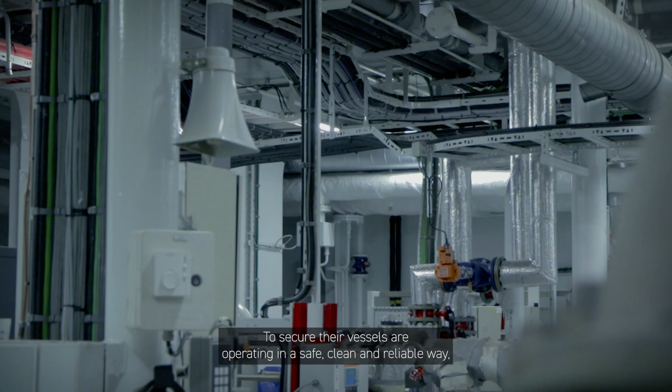The global commercial shipping fleet is responsible for the transport of around 90% of the world trade. To secure their vessels are operating in a safe, clean and reliable way, the shipping companies invest in the best propulsion, automation, monitoring and safety equipment possible. Even still, unwanted incidents happen from time to time, one such serious incident being the blackout.

Blackouts occur when there is sudden total loss of electrical power in the ship's main power system. It is an incident that scares even the most experienced of mariners, as it brings the whole vessel to immediate standstill. Troubleshooting blackouts can be a tedious process.

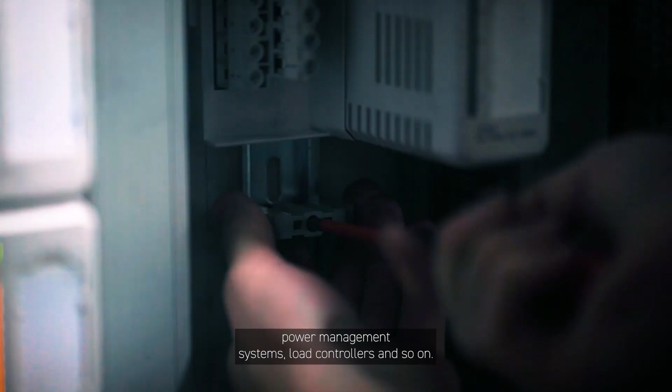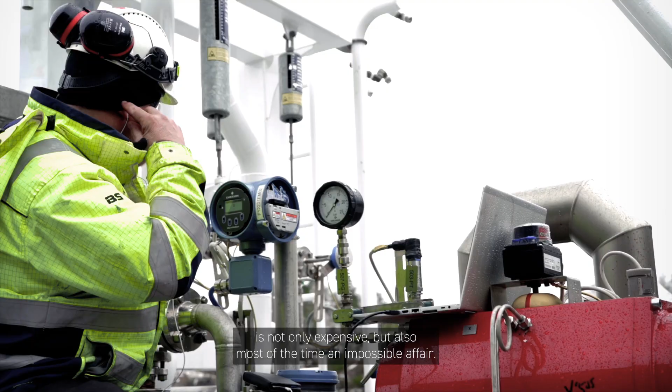Advanced vessels have multiple systems that are involved in the power generation, such as engines, generators, engine control systems, voltage regulators, power management systems, load controllers, and so on. Calling out system specialists to figure out the cause and events leading to the vessel blacking out is not only expensive, but also most of the time an impossible affair.

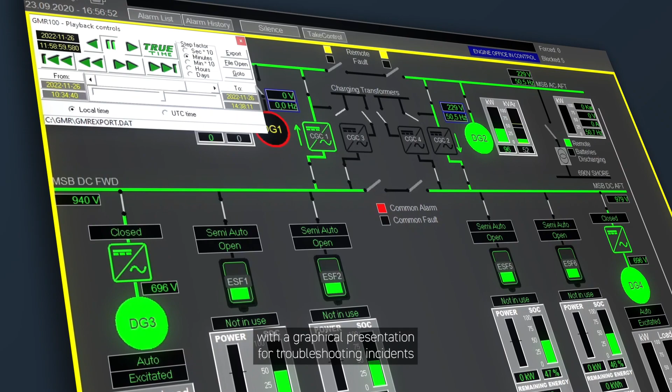With so many system factors that affect the outcome, the only reasonable investigation method is to check the historical data by using Høglund Playback. Høglund Playback is a unique logging tool with a graphical presentation for troubleshooting incidents fully integrated in the Høglund automation system. Høglund Playback logs every signal in the automation system every second and stores it in a replayable file.

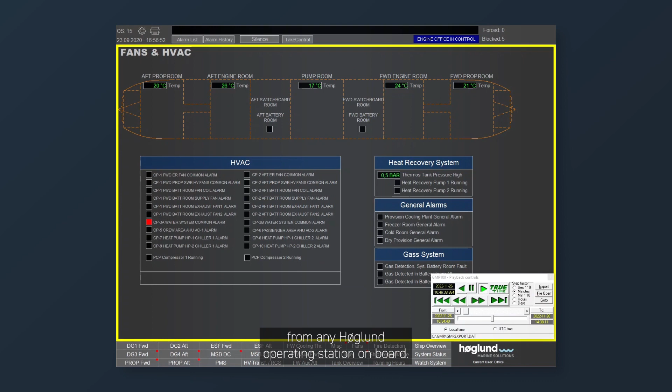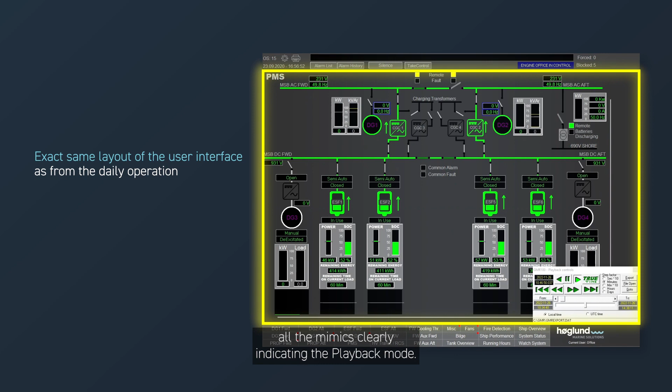Crew will be able to start playback mode from any Høglund operating station on board. They will see the exact same layout of the user interface as from the daily operation, but with a yellow frame around all the mimics, clearly indicating the playback mode. You just start the playback, rewind back to the time of the incident, and navigate backwards and forwards through the displays.

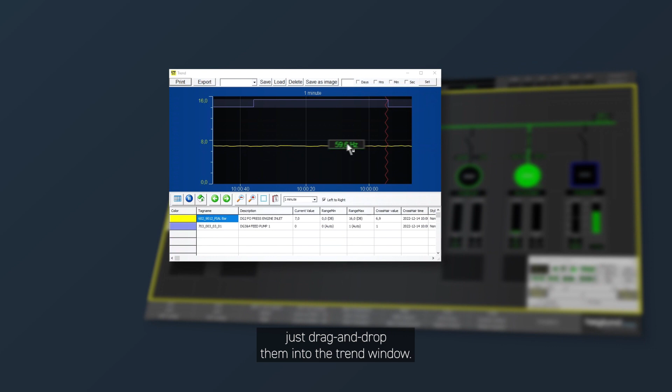When you need to compare signals in detail, simply right-click any object and click Trend to open a new trend window. To add more signals in the same trend window, just drag and drop them into the trend window. Use the navigation buttons and range selection properties to adjust and navigate as needed.

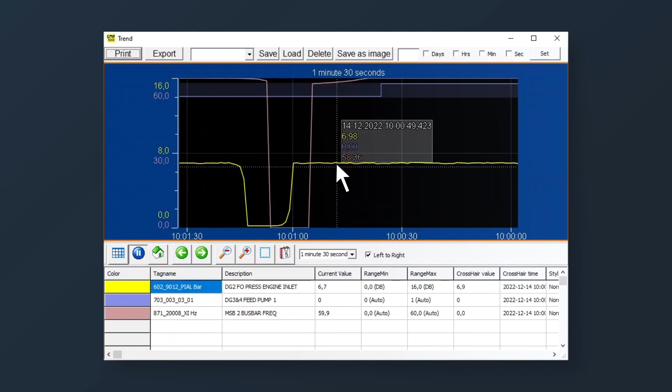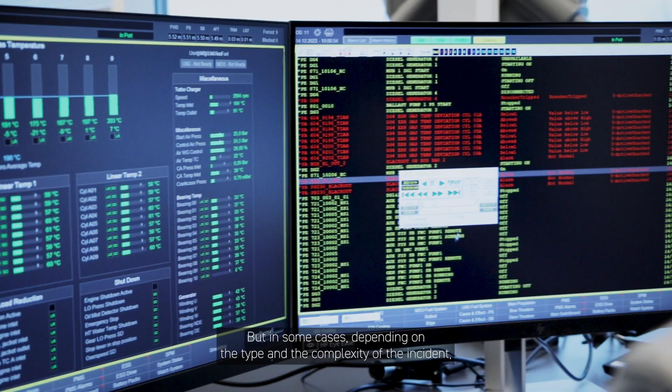In most cases, you will manage to investigate and find the cause of the problem entirely on your own. But in some cases, depending on the type and the complexity of the incident, you might want to ask a colleague, system vendor, or a Høglund service engineer for assistance.

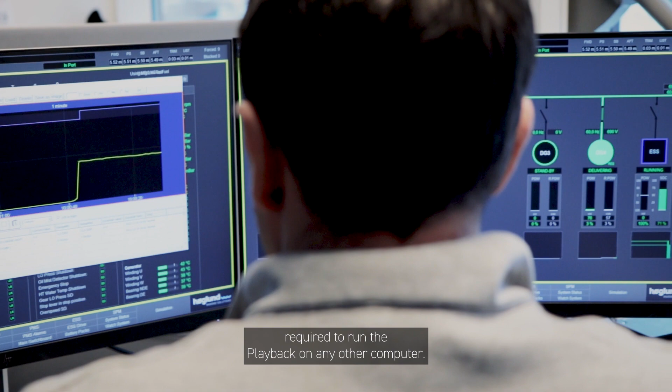By generating a playback export, you can create and compress a playable file that contains all the data required to run the playback on any other computer. Thanks to Playback, we have since 1995 successfully solved hundreds of incidents on vessels all over the world.